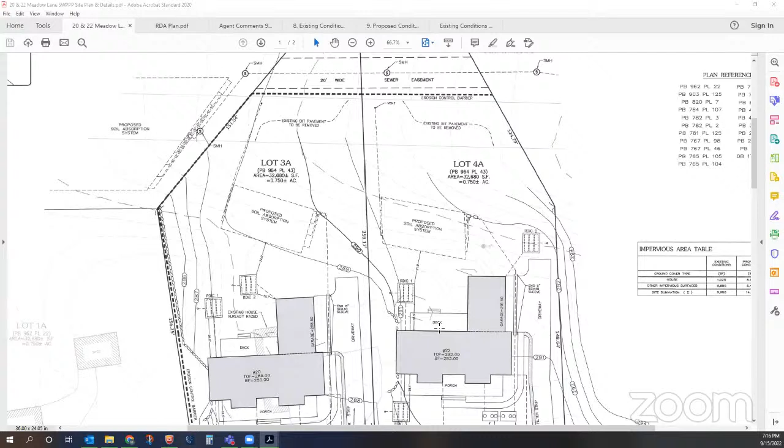So where 20 is, is basically where the other house was torn down. I believe 22 is not quite to where that building is. That's directly across the street from our house, because I believe there are two lots even before you get to that, but yeah, that is the old house. I misspoke, but the hangar is probably just to the right of 22, because that's about where that driveway is.

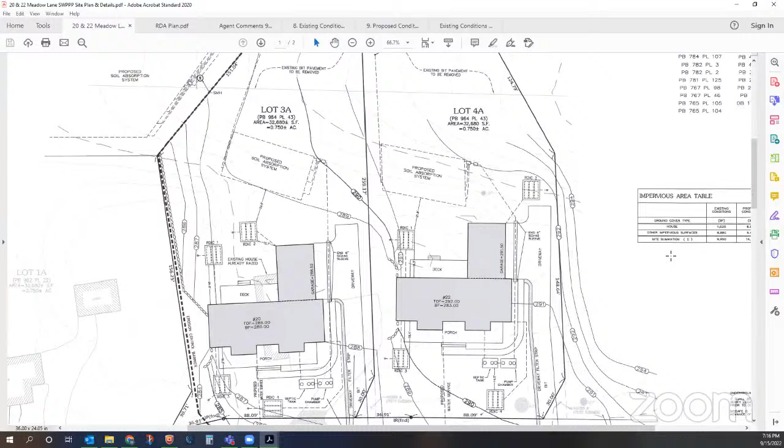Right, I think that's the case. Okay, thank you for correcting that. That was all I had. Thank you, all right, thank you.

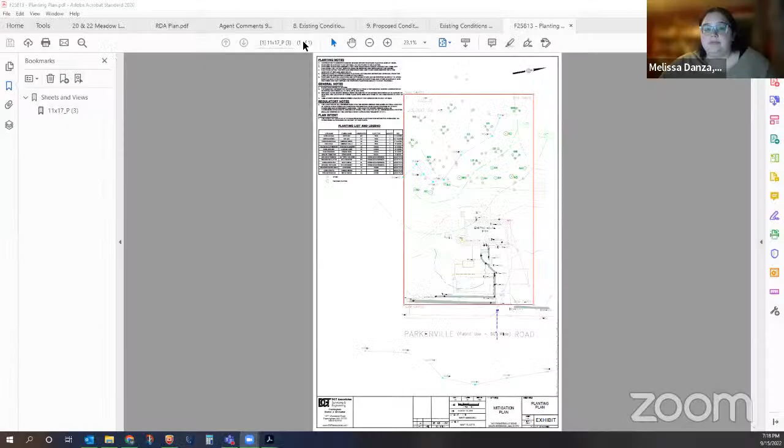Okay, first, good evening, Mr. Lozano, thank you for joining us tonight. You and Joe Orzel, Joe was able to provide a review and get back to you, and you've incorporated his comments. Do I have that correct?

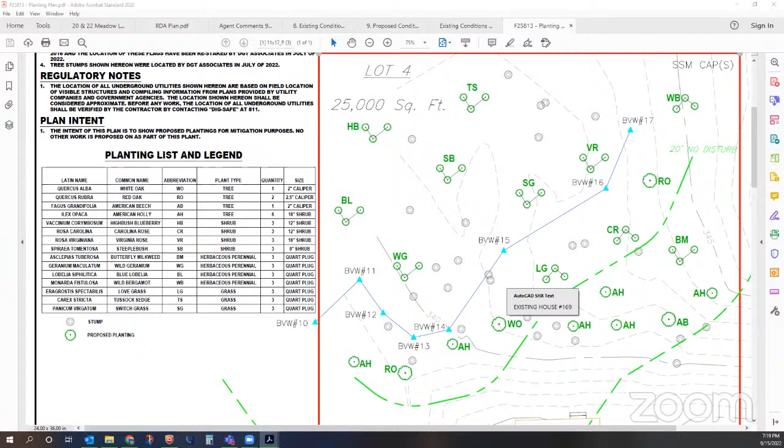Yes, he requested I move a couple of different plants around, and then there was just, I made a mistake on the Latin name, I swapped two of the Latin names of some of the plants, and I fixed that since I last talked to him.

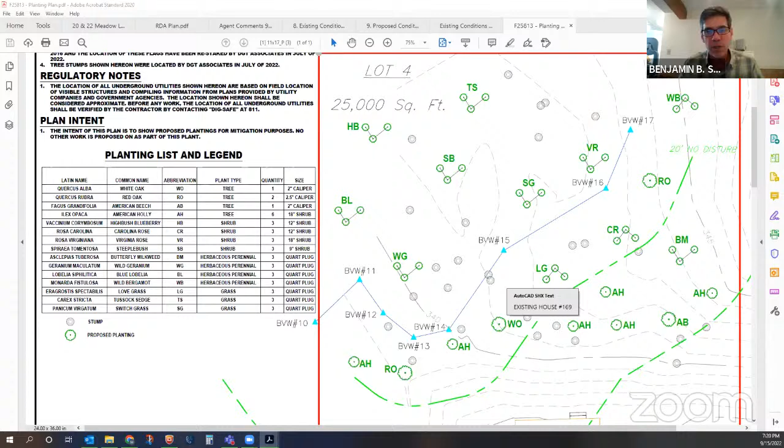Oh great. And what Melissa was talking about, we sort of define success as an 80% survival rate on restoration projects. And it sounds like we would be looking for, just at the 1 year mark, a quick report, not particularly formal, but just indicating the current status of the plantings, and then a closeout at the year 2 mark. That would involve just a walkthrough by Melissa, just to take a look at the plants and verify there's an 80% survival rate. And that'll be the end of it, if that's acceptable to you.

Yeah, I think if you scroll up just a hair on the plan, I might already have a note about it, I don't know if I specify a percentage, but I do. Oh yeah, proposed plantings shall require a 2-year monitoring period. During this time, any plantings that do not survive shall be removed and replaced by the owner. That's my planting note number 3.

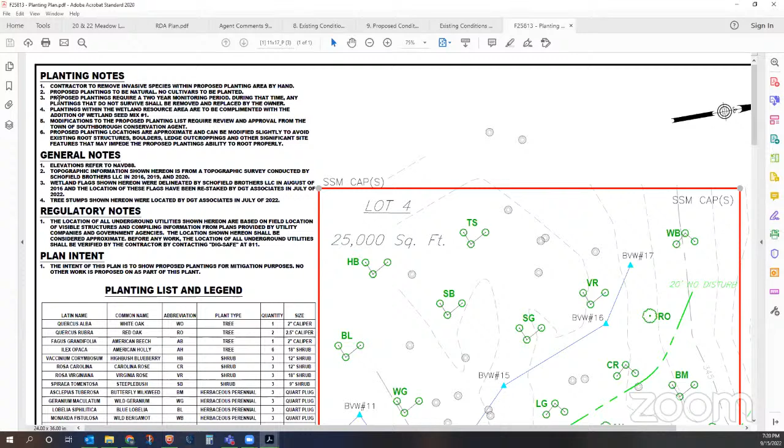I guess if you want, we were already planning on doing something along those lines, so that's fine. Okay, and with that, are there any questions, comments, concerns from the commission?

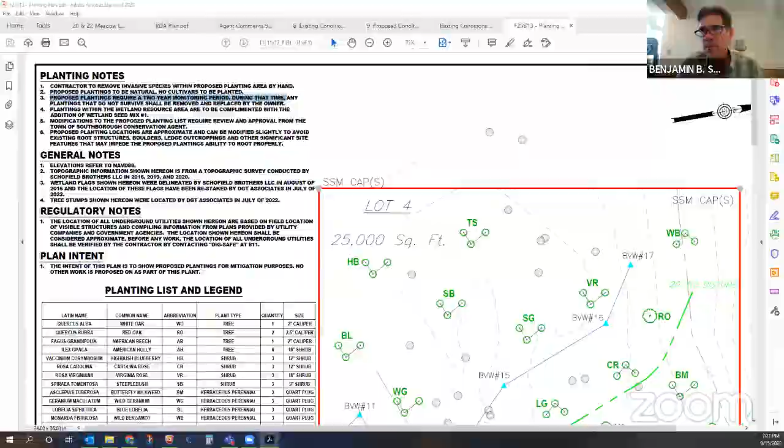Okay, if there's anybody here from the public who wishes to speak on this matter, please use the raise hand function and we will promote you up. Okay, not seeing anyone, so it looks like we have things well in hand.

Melissa, was this a formal enforcement order? It wasn't a formal enforcement order, but it was a formal violation. So I would recommend the commission make a vote to the effect that we discussed tonight with these as an approved plan. So I guess we'd be looking for a motion to approve the planting plan as recently updated and as discussed tonight, with the conditions that we discussed regarding monitoring.

So moved. And is there a second? Uh-oh, Russ is frozen. Oh no, I can't second. You could even make a motion if you wanted. As chair, I did. Well, then I'm going to second. All right, we still have to wait for Russ anyways. Oh, no. Oh, there he is. All right, there we go. You're frozen, Russ. Second.

All those in favor: Farrington, yes. Gregory, yes. Smith, yes. All right, Mark, out in the universe, you may return.

Okay, and Mr. Lozano, thank you again for joining us tonight. It sounds like we've got a plan going forward. Just real quick question, Melissa, are you going to send me some sort of email that says... yeah, okay. By Monday I'll get that to you. Okay, awesome, I appreciate you. Have a good one. You too.

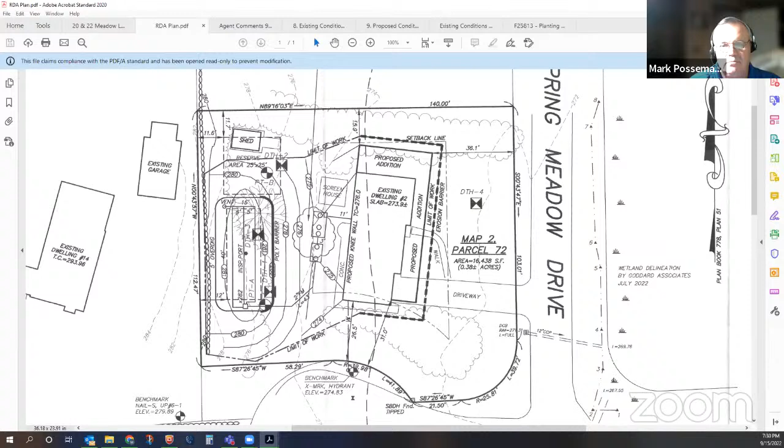Do we need -- as a board, I'm sorry, just a procedural question -- do we need to do a second vote to waive the SMP requirement? As long as you're comfortable with voting it into a finding of fact within the RDA, then I can memorialize it that way. Great.

All right, so do I hear a motion on the table? So moved. Is there a second? Second. Okay, all in favor? Barrington, yes. Gregory, yes. Smith, yes. Hasamato, yes. All right, you guys are all set.

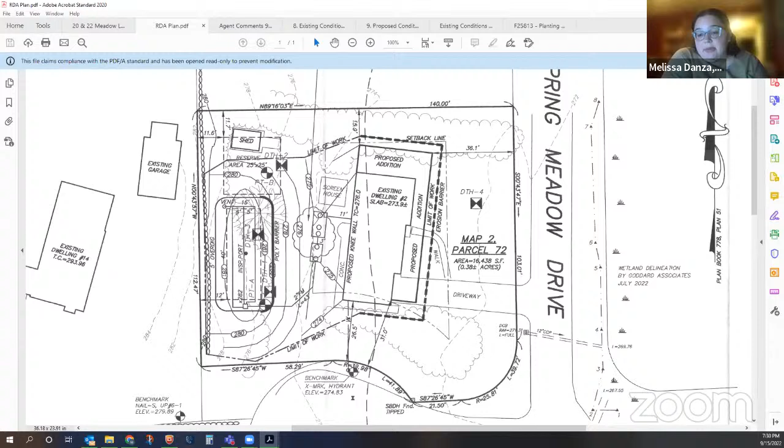I'll touch base with you by Monday just to let you know the final steps. Thank you so much, all. Thank you, guys. Have a great night. Good evening. Thank you.

Okay, we can move on to NOI for 10 Presidential Drive. In accordance with the Wetlands Protection Act, Mass General Laws Chapter 131, Section 40, the Southborough Wetlands Bylaw, the Southborough Conservation Commission will conduct a public hearing on Thursday, September 15th, 2022 at 7:30 p.m. via virtual Zoom meeting. The commission will consider a notice of intent for a project located at 10 Presidential Drive, map 82, lot 25, for the applicant and owner Stephanie Butler. The project description is construction of landscape area, stone steps, and retaining wall, and rebuilding of rock walls.

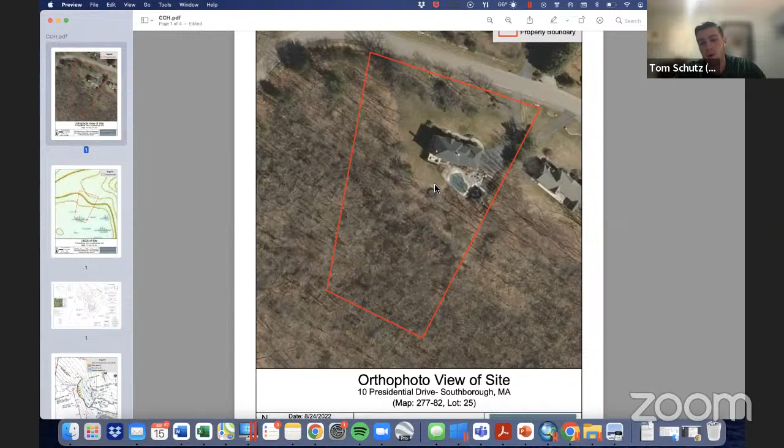Here's the ortho, or the USGS, of the site. As you can see, the wetland behind the property is mapped on this as well.

So the applicant is looking to build a retaining wall, which can be seen right here. We're also looking to put in a landscaped area, natural stone steps made from boulders and rocks, and a footpath. This landscaped area is going to be encompassed by small pavers, with rebuilding of these walls.

They're going to be replacing these pavers around it, placing plants in there, and connecting it all by this little path. Again, here's the retaining wall that's going to keep everything inside. All of this work will be taking place within the 50 and 100 foot buffer zones.

Here is our erosion control barrier, outlined in this thicker line. This plan is a little bit incorrect as the tree line was missurveyed, so we're also proposing a mitigation plan.

We're proposing to plant all through the outside where my cursor is right here. I think it's right around 245 square feet as it currently stands. However, once this tree line gets resurveyed, we're going to be submitting a more robust mitigation plan, somewhere around 2,000 square feet with many more plantings than what I'm going to show you. So we're currently working through those changes.

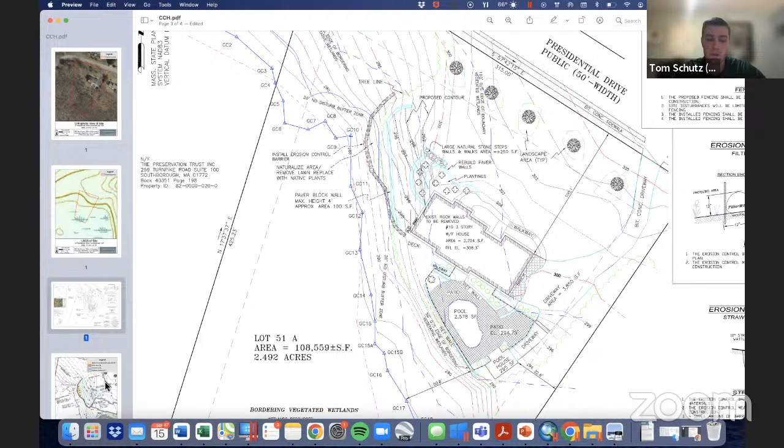I know Melissa had spoken to Andrew about this, so once this is all resurveyed, you're going to get a full new mitigation plan. We just didn't have time tonight to submit it last week and present it tonight. So here's our mitigation plan as it currently stands. Again, this will expand - this is just what we submitted with the notice of intent, not knowing that this tree line was so off on the plan.

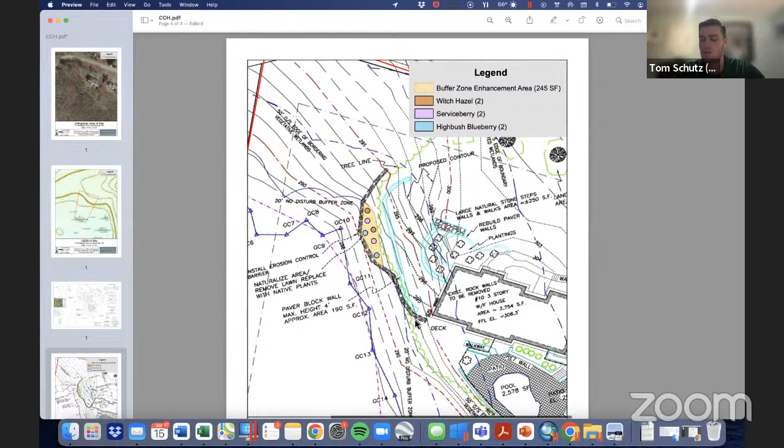Currently we have 6 plants proposed: 2 witch hazels, 2 serviceberries, and 2 highbush blueberries. At the next hearing, you'll see a more robust mitigation plan that will be planted throughout this whole section down here, and it's also going to have a change in the erosion control barrier. So at this time, I'd like to open it up to the commission to answer any questions or address any comments.

Anybody have any questions or comments?

I've got a question about the vegetation within the existing tree line. Could you describe to me the vegetation within that tree line? Is it mature trees? Is it scrub? It's a lot of mature trees with a few shrubs dotted here and there.

So this is really just going to naturalize that and add a bunch more shrubs to that whole area. There's big gaps between those trees, so these shrubs will fit in nicely with the surrounding vegetation. These trees - witch hazel is an upland plant, serviceberry is more of a wetland plant, and highbush blueberry too. So I would assume the serviceberry and highbush blueberry would be planted more towards the wetland side, as those need the hydrology, and the witch hazels planted back more towards the property.

Okay, I guess the purpose of my question is whether it's appropriate to include more of an upper story as well, if that's what the existing area is. So you'd like to see some trees also proposed in this? Yeah, I guess if Tom has taken a look at this, I'd be very curious to hear what Lucas Environmental has to say on that. Other than that, I have no other comments.

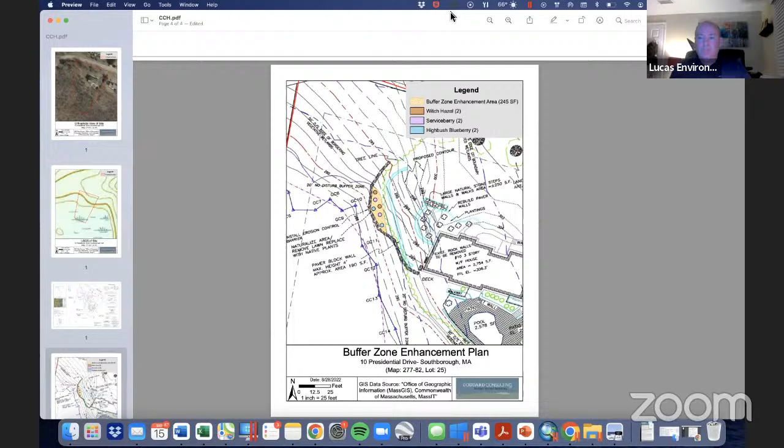But I guess, Tom, if the plan is going to be updated, it sounds like as part of the mitigation, in particular within the 20-foot zone, something of an upper story with whatever's out there, whether it's white oak or red maple or whatever, just a couple to extend the existing habitat.

Mark: I'm looking at the DEP sheets now that were submitted with the notice of intent. It looks like there was red maple, red oak, and white pine that all dominated the tree layer out there, so we'll definitely incorporate some of those into our planting plan when we come back with the revised plan.

I do have some photos from Joe's site visit if you wanted me to share some, at least of the tree line. It doesn't give a great view, but at least shows you. Thank you, that would help, Ben. Would that be useful if I shared that? Yeah, if you could, really quickly.

Thank you all. The only other point on the plan — it doesn't seem to be stamped by a PE or surveyor, so I think that's something that's typically required for the commission. Not stamped or signed? It was not stamped or signed, no. Okay, yeah, that's necessary.